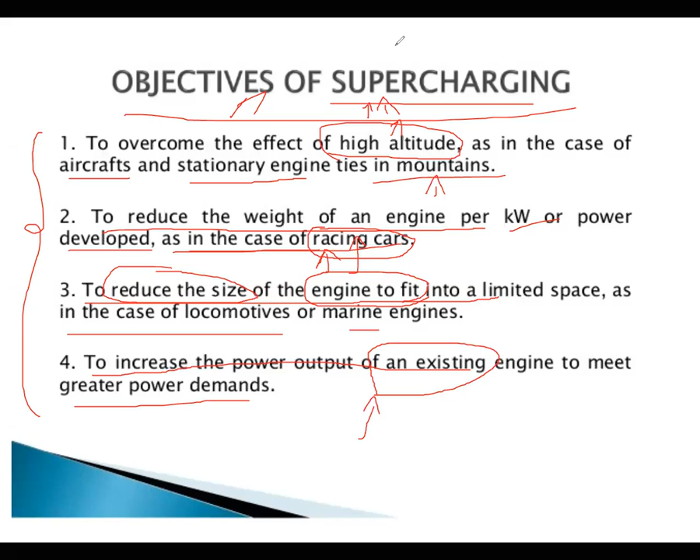Next, coming to a few advantages of placing a supercharger at the engine. One is increasing horsepower. The main intention of providing a supercharger to the engine is to increase power, providing a large amount of power.

The second advantage is no lag. If the supercharger is not there, the suction stroke would not take place at the correct time, the compression stroke also would not take place at the correct time. So each of the four strokes cannot happen at the correct time or open at the correct angle, because some gases remain in the combustion chamber, and the suction and exhaust valves do not open or close at the correct time. This leads to a lag. As the lag keeps increasing, sufficient power development cannot take place. So no lag should be allowed.

So in order to reduce the lag in each stroke, supercharging is required there.

By that, the engine efficiency can be increased. So that is why, with a supercharger, no lagging takes place. So each and every stroke can work at its respective time and respective angle, opening and closing. Then the power can be produced at a large rate.

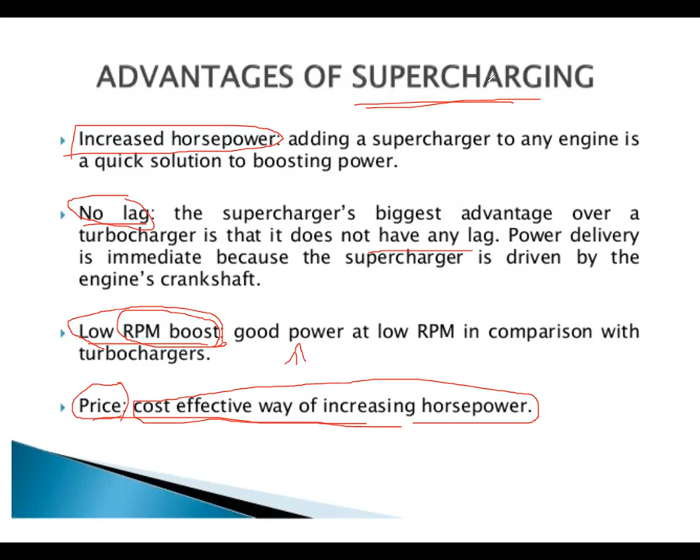By placing a supercharger, the engine can produce a large amount of power, and the engine consumes less fuel, so money can be saved here. The amount of money can be saved by placing a supercharger. So that is one advantage.

Coming to the disadvantages, of course we have some disadvantages. It consumes a lot of power from the engine, so the engine undergoes some pressure, a lot of work. A lot of work means the engine working hours increase. Therefore the life of the engine is minimized by some hours, right? Not a large amount, but a little bit of minimization takes place here.

Next, increased strain on the engine. If the process is continuously done by placing a supercharger, even though there is increasing power, the strain on the engine is more. Whenever the strain on the engine is more, the life of the engine is reduced. That means more maintenance cost will take place, right?

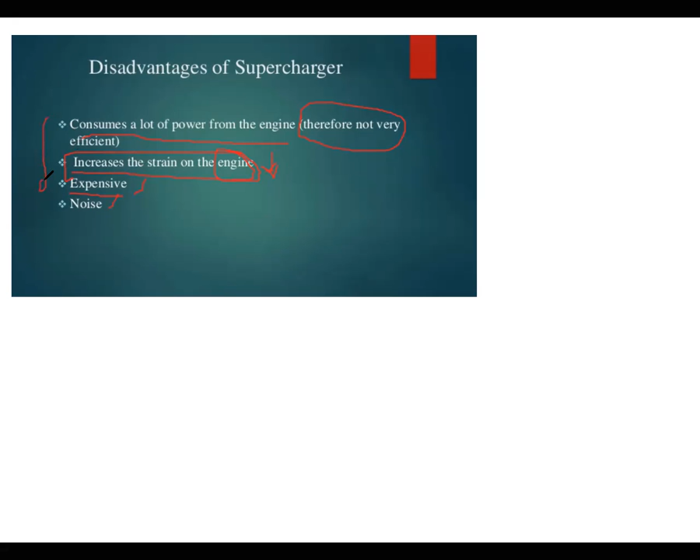Sometimes it is expensive also. Expensive is nothing but maintenance cost keeps on rising, so that is called expensive. And also it's somewhat noisy. In the last slide also I told you about noise. So in order to reduce the noise, some precautions and some steps we have to take, right? So these are a few disadvantages here. Next.

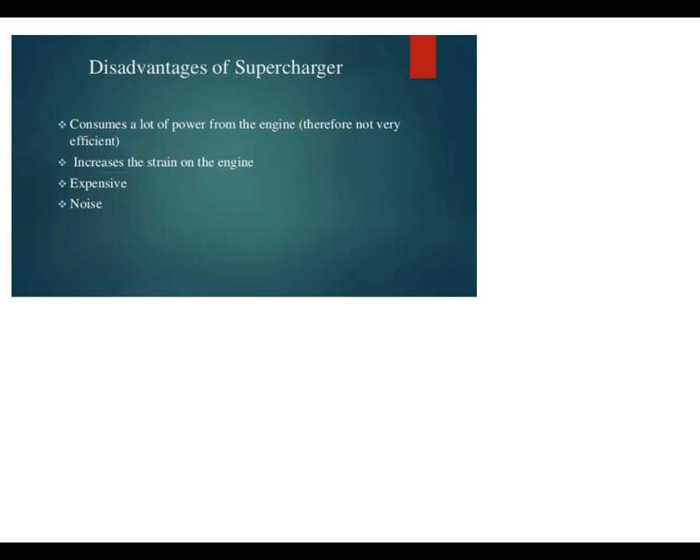So we have seen the advantages, disadvantages, and some objectives of the supercharger. There are especially three types of superchargers. We'll go through them. First, roots type; second, centrifugal type; third, screw type. Each one is a kind of supercharger.

Of course, these three types of superchargers are used for sucking, or dragging, atmospheric air, by the roots method, the centrifugal compressor method, or the screw method. The working principle is the same for all three types, but the method used to drag the atmospheric air is different. Once the air is drawn from the atmosphere, the working principle of the supercharger is the same, right?

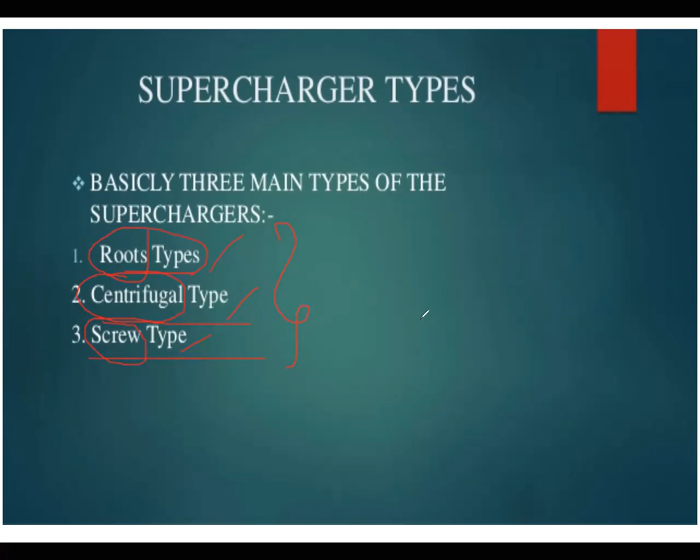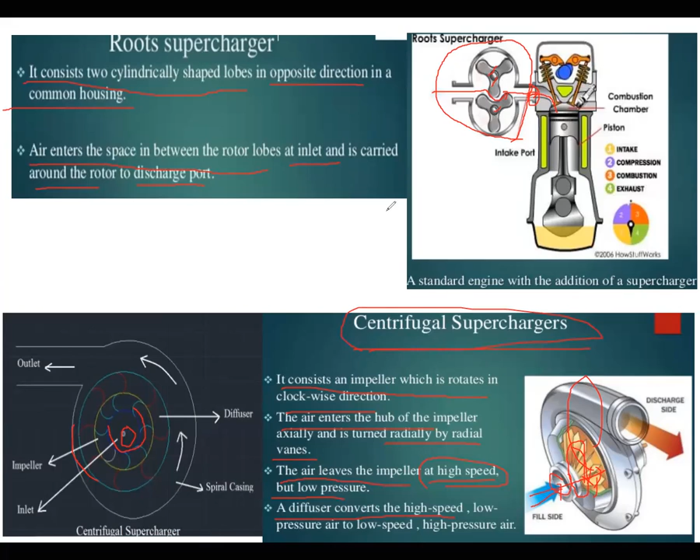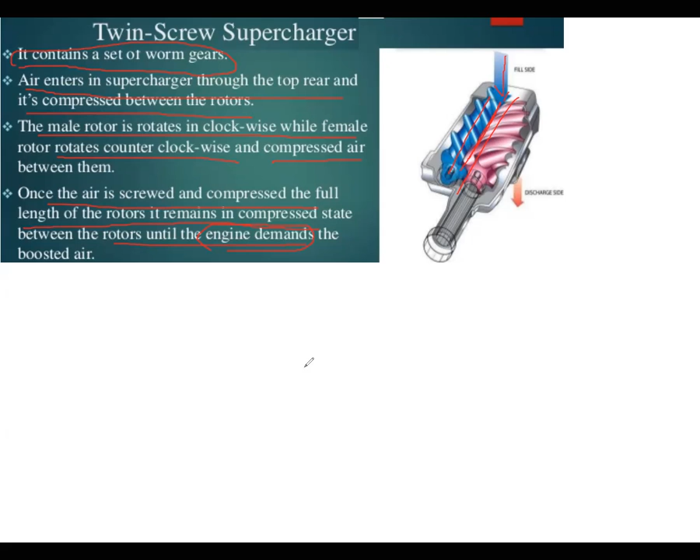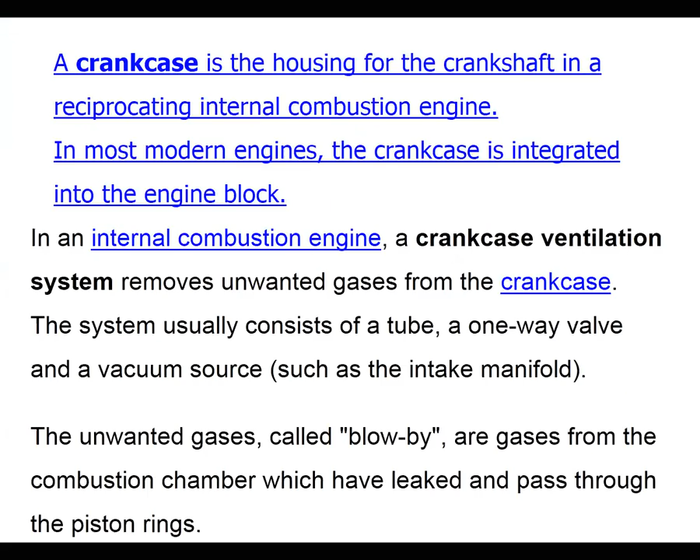Next, coming to one topic, crankcase ventilation. The crankcase ventilation system is most important. I'll explain it through a diagram. As we know, the engine takes four strokes: suction, compression, expansion, then exhaust, through the exhaust valve. During suction, the air is taken from the atmosphere. Then it is the compression stroke, then the power stroke, expansion. The exhaust gases are released into the atmosphere. So we know this is the principle.

But while the air-fuel is combusting in the combustion chamber, some of the gases are coming out from the piston rings. So some of the unburnt gases are escaping from the combustion chamber to the crankcase housing. This is called the crankcase housing.

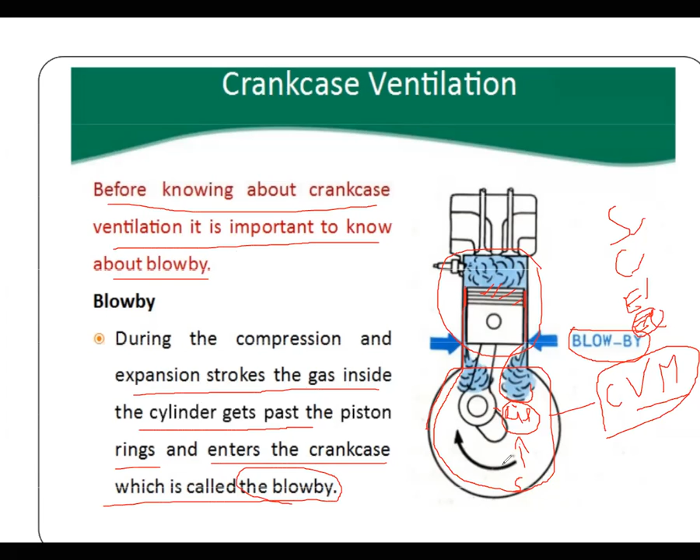Next, before knowing about the crankcase ventilation system, it is important to know about blow by. Blow by is nothing but, during the expansion stroke, the gas inside the cylinder gets past the piston rings and enters into the crankcase housing. That is called the blow by process. Next, I'll show you how to provide ventilation.

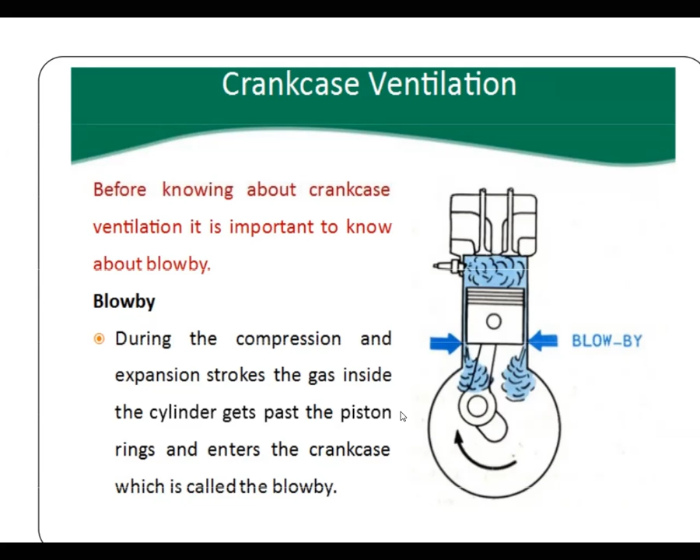So this is the ventilation provided over here. Just observe this. Till now I explained only this area. Blow by gases are entering and rotating in the crankcase housing and combining with oil particles. It leads to blacking of the engine. So in order to minimize blacking of the engine, we are providing one method, one process.

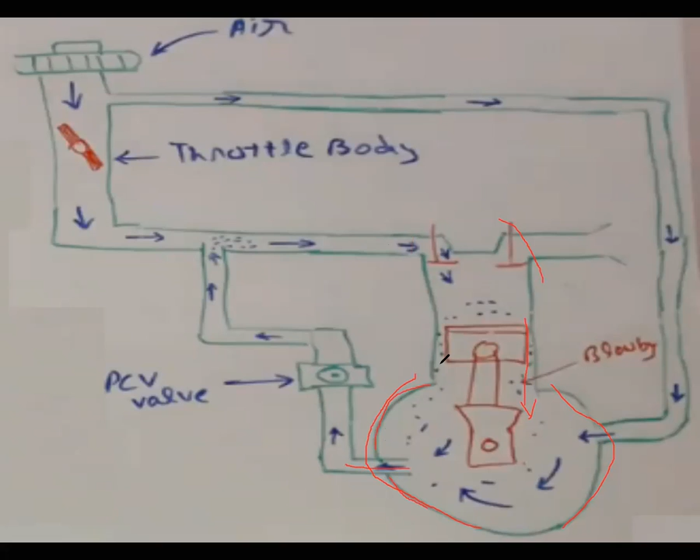The process is called the crankcase ventilation process, crankcase ventilation method. You see here, there is one small passage in the crankcase housing. You can see this passage. Through that passage, the blow by gases are going out.

At an earlier stage of design, it was releasing into the atmosphere, but later on another method was developed, called reusing of crankcase blow by gases. Reusing of crankcase blow by gases means that one passage is provided. Through that passage, the gases are moving, and finally these gases are joining into the inlet port, the passage provided to the suction stroke.

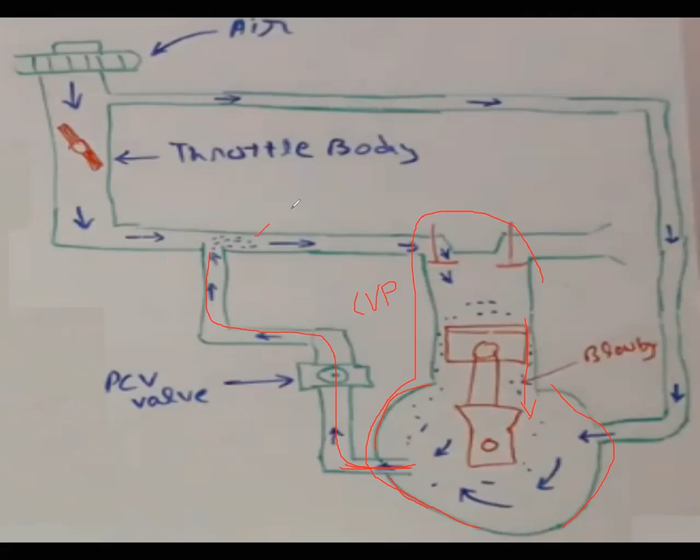Because through this passage, suction air is moving to the suction stroke. So these gases are reused and provided to the suction air. That means they merge with the suction air and are allowed to enter into the suction, because these gases are unburnt gases.

These gases are just pressurized; some amount of pressure is increased and some amount of velocity is also increased. So it's just like pressurized air, unburnt gases. Those gases re-enter into the suction stroke. The suction side is nothing but the suction manifold or inlet manifold. They re-enter into the inlet manifold, enter the suction stroke, and again meet the combustion chamber.

The blow by gases meet the combustion chamber for reburning, so this is the arrangement. The arrangement is called PCV, positive crankcase ventilation. It is a one-directional valve. It cannot allow the second direction, only one direction.

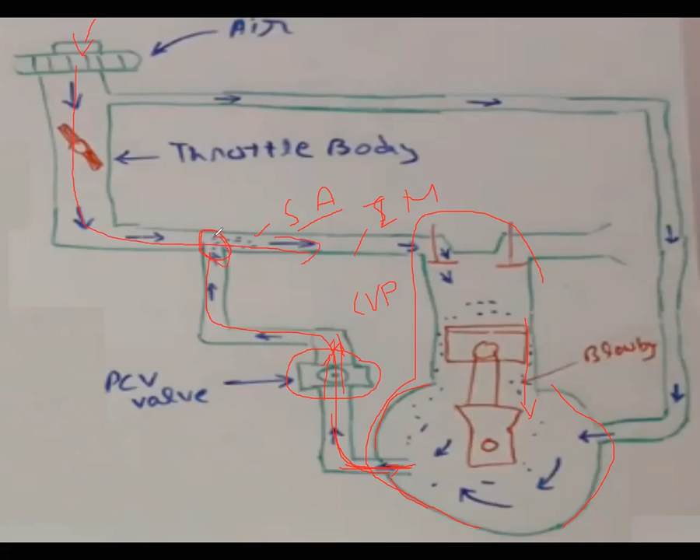So the atmospheric air through the throttle valve will enter into here, and the gases are rejoining over here and coming out. And this passage is for what? Because in some cases the pressure is not sufficient for the gases to pass through this passage. So some extra pressure is required, some extra vacuum is required. So the extra vacuum is provided from the inlet port.

So this is called the atmospheric air. The atmospheric air is coming and entering into the crankcase housing, so that the pressure can be increased. That pressure helps us to pass the gases through this port, through this manifold, through this passage. So this is what the crankcase ventilation system means.

So some of the unburnt gases are entering into the crankcase housing. Those gases have to be sent out. In order to send them out from the crankcase housing, it requires a one-way valve. Sometimes the pressure is not sufficient for the gases to pass through the one-way valve. So in that case, some extra air is required.

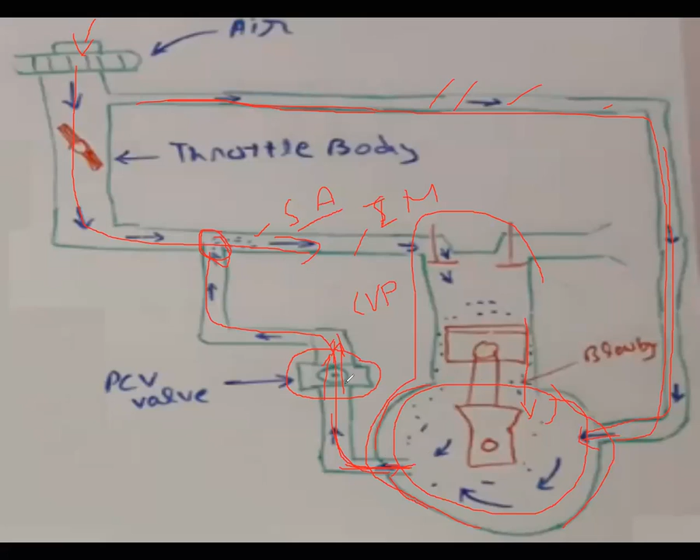The air is taken from the atmosphere, so that there is sufficient pressure on the gases, which lets them easily pass through this manifold, through this port. Clear? So this is the crankcase ventilation system, which is most important nowadays on vehicles, in order to reduce the blackening of engines.

You can see the total setup here, the PCV valve here like this. So this is the one method, through that PCV valve, and it is rejoining over here. After that the rejoining air and fresh air mix together and pass through the intake manifold, and enter into the combustion chamber through the suction stroke. After that it is as usual, some exhaust gases are there.

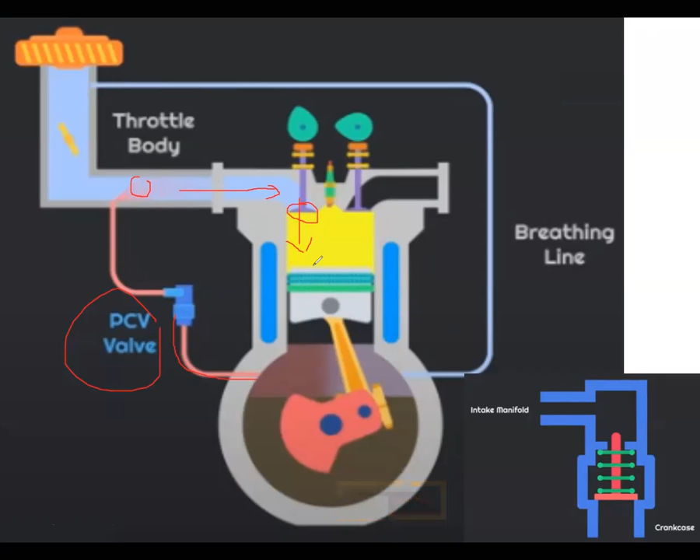Exhaust gases would be sent to the exhaust manifold, and of course we have a turbocharger here. We can use a turbocharger, and we can reuse those gases also. You can see that valve, this kind of one-way valve. This is the way the spring is there with pressure.

Whenever the pressure is increasing from the crankcase, the pressure will pass through this. So there is a spring, and through that pressure the spring will go up, so that there is a little bit of passage. Through that passage the gases will go out. This is the valve position at this respective place. Clear?

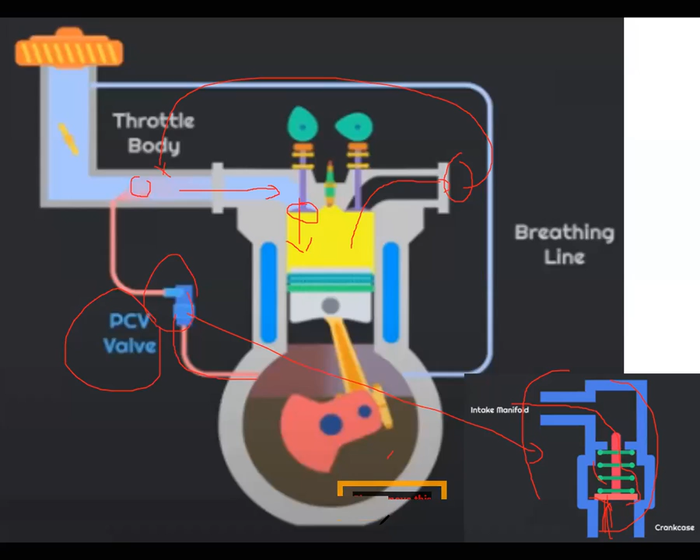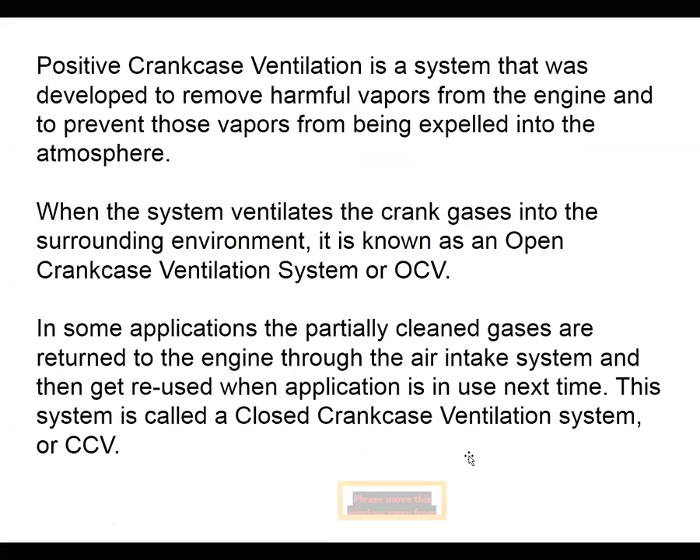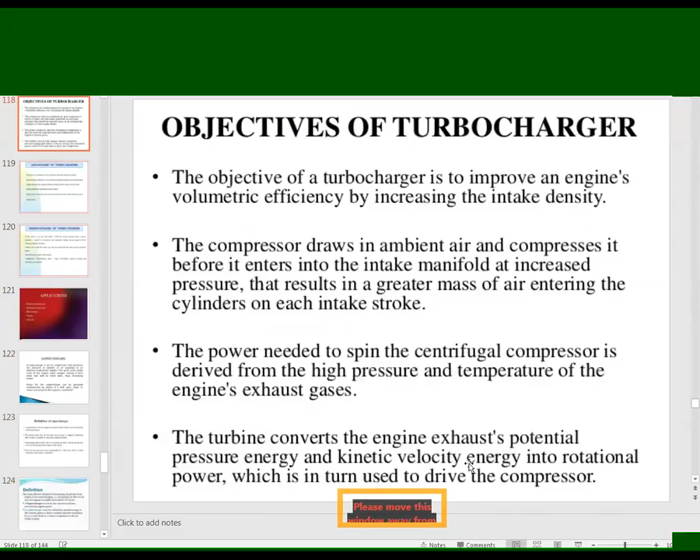Right. This is about the crankcase, sources of crankcase gases, and the working principle. So today we took two concepts. One is supercharging, another one is what? Crankcase ventilation system. So total three concepts are there here. Turbocharging is one concept, supercharging is one concept, and providing crankcase ventilation is one concept. These three concepts are very important for this unit. So you have to be ready.

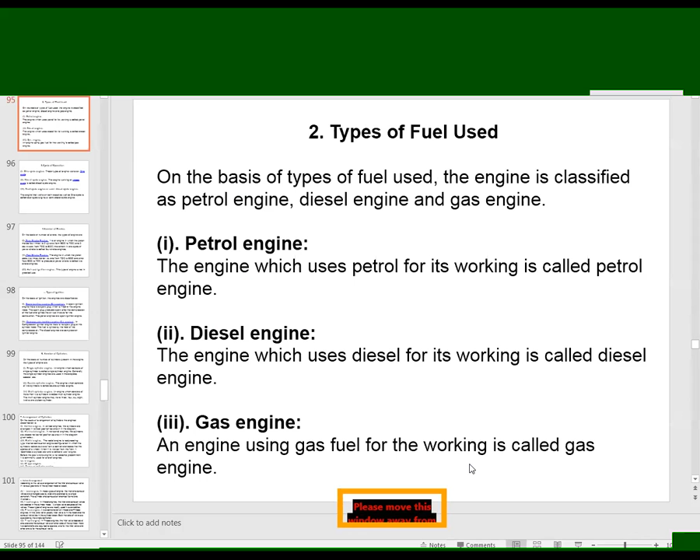So with that we have completed the first unit. Next class I'll take you through the second unit, power transmission, how power transmission is taking place. Component by component of the automobile we'll take from the next class onwards, right? So I have only 2 minutes. If you have any doubts you can ask me from the first unit, right?

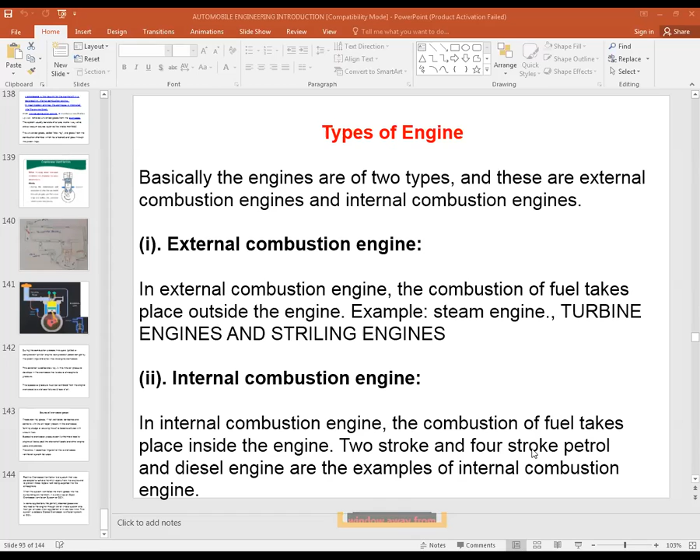Okay, guys, I'm running out of time. You can contact me later. CAD-CAM faculty, sir? I'm searching for that only. We took one person, but he was not coming. We are trying another person. Okay. Only CAD-CAM, no, from your side? Five more subjects are running, sir. Right? Five subjects are running, no? Madhu sir's PO subject only, sir. Madhu sir is facing some problems because his father is not well.